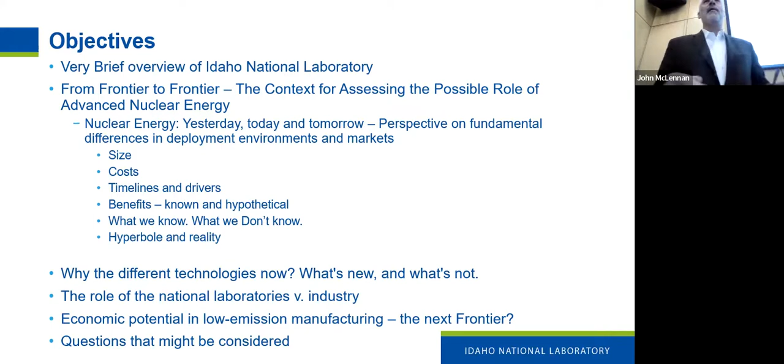So who in the room is familiar with the National Lab System? Probably many of you, so I'm going to skip this.

The Idaho National Lab, I have to tell you where I'm from. The Idaho National Lab is one of 17 multi-purpose labs. The important point is we are the nation's lead for nuclear energy within the National Lab System, not the only lab, but that also comes with a lot of other responsibilities and capabilities, mostly in the national security area, in addition to nuclear energy. So we're just one of many. Lots of good labs out there. But our roots are really very unique.

I think every institution has a DNA, if you will. They have DNA that comes from their past, and it really does carry over into what you see today. All the national labs are like that. The roots of our national lab are very much, I like to think about it, rooted in engineering research. It's not necessarily science per se, it's engineering research. It's how do you build things? How do you scale? How do you understand what works, what doesn't? How do you operate those systems? And then what science needs to go back into the feedback loop?

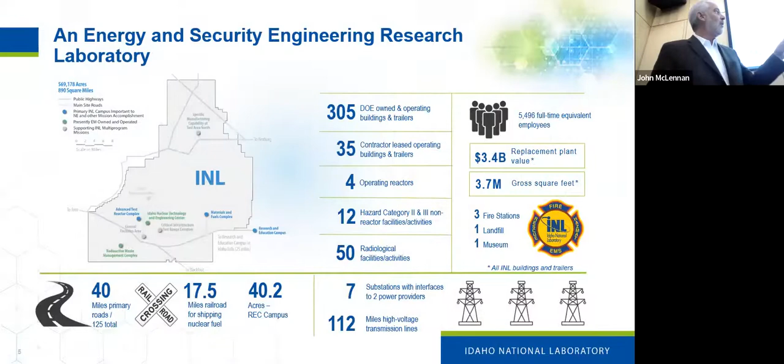So what that history left has actually been built upon quite a lot, is a huge set of infrastructure. You go out to the 890 square miles and you see little mini sites that look like small towns, set up basically to do these different parts of that nuclear energy mission. But that's being deployed now across nuclear energy, but also national security programs. It's a really very important part of the national capability for a number of different purposes. It's quite a neat place to be.

So, past, present, and future. Let's start with nuclear energy from the standpoint of 70 years ago, like I mentioned earlier. You didn't have any of the infrastructure that you have today. You didn't have any regulatory construct. You had actually a lot of hype about the potential for nuclear. Who remembers or has read about a reactor in every backyard? Do you remember that? Read some of the history—that was seriously talked about. So there was an enormous promise for this high density energy source.

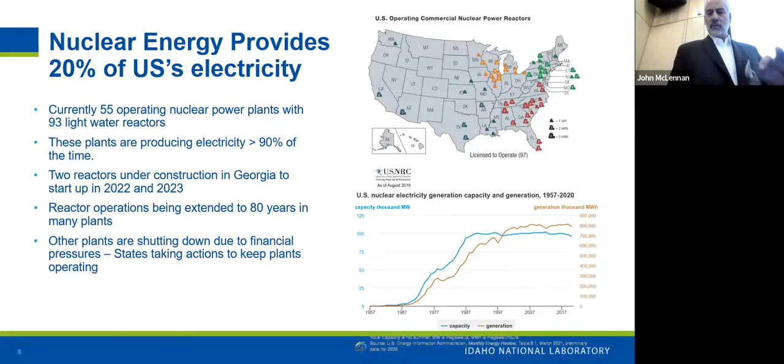Because you do have a mature global nuclear energy industry now. Like I said, 20% in the United States. It's projected that globally it's about an $8 trillion market just in the next 20 or so years. So $8 trillion market. And I'm trying to think what size of market commercial aircraft are.

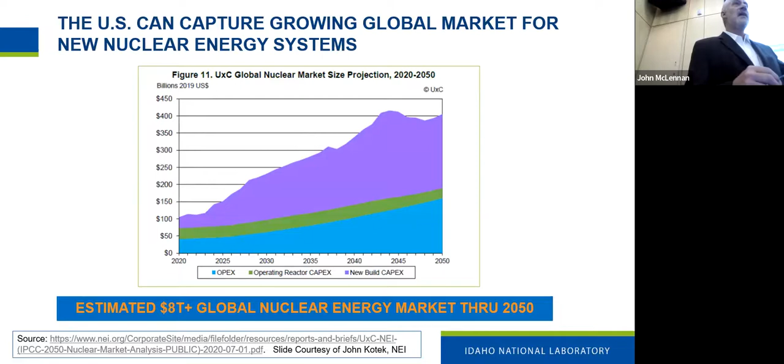I think it's on the order of 15 trillion in that same time frame. So think of the scale that you have today, again, starting from nothing 70 years ago. So what's different? The reason we talk about the context actually gets to the point of why you're hearing about different types of reactors. And many times, the types of reactors that you hear about that might be suitable for today and beyond are different than the last reactors in terms of size. Yeah, there's different classes, styles of reactors as well.

Just like there are different types of cars. They're all cars, but there's different models. And you buy a car to match whatever it is you're doing, whether it's traveling on the highway or somebody like me who's going out camping in the mountains and needs something different. Same thing with reactors. So let's take a look at the general classes of reactors that you're going to hear about.

So existing reactors, very large, generally very large power reactors, right? They have, on the order of thousands of megawatts, 1,000 megawatt a unit. Some of them that are being built in Asia are now 1,800 megawatts, and that's electric. So in terms of heat energy, it's almost three times that amount. They're enormous machines, heat producing machines.

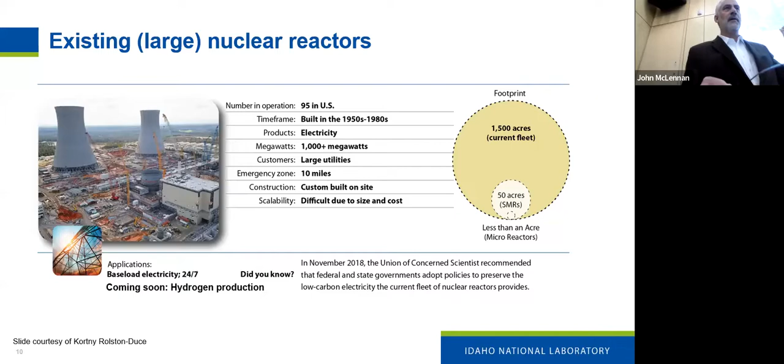So small modular reactors, much smaller, stamp them out. They're standardized in form, but there's also some really important, what people like to call, and I think is an adequate term, inherent safety features that come with these small sizes. So they respond to off-normal events through the physics of the machine, not necessarily relying on engineered systems. And that's where you want to go. So you're flying an airplane and the engines go out, you want to be able to glide that down, okay, without doing much.

These are even better than that because you shut off cooling and they rely on natural circulation. So the notion is you cannot get something like a Fukushima event where cooling water shuts off and within hours you have a problem.

So modularity, inherent safety features, cost, affordability, investability, efficient use of capital, the dollars that you have to play. They also have very small footprints because of the individual nature of those reactor cores.

So you go down to a 50-acre site. And I believe these are being licensed or will be licensed with an exclusion zone at the fence of the facility, so no need for these 10-mile safety evacuation zones and things like that.

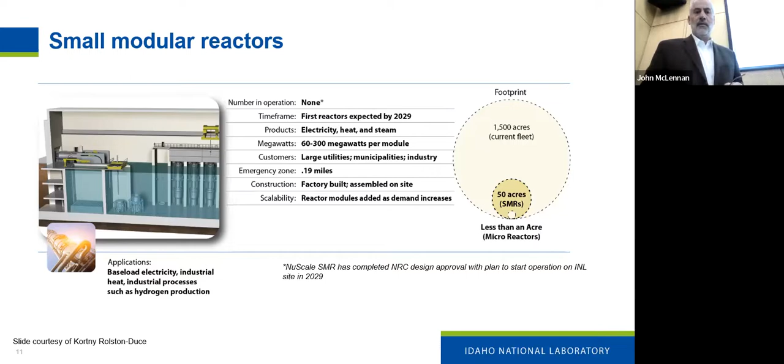You can always improve. Now, this is the area I'm most excited about, and it's microreactors. So what is a microreactor? It's a small reactor that's less than about 20 megawatts. So they're very small.

Now, why is that important? So microreactors can be used for all kinds of different types of applications where you're not going to build a 1,000 megawatt reactor. You're not even going to build, you know, one of these, 6 modules of 80 and 100 megawatt reactors. You want 20 and 50 megawatts at a time.

Now, where might that be? Well, if you're a chemical plant and you want to start reducing your carbon emissions, you can start plugging in 20 or less megawatts of heat at a time with microreactor.

Let's say you're in a mining application. Lots of mines being sited to mine critical minerals for batteries now. Huge interest in microreactors to power those mine sites, which tend to be 10 to 20 megawatts at a time. Alaska, Canada, even remote areas in the West.

Microreactors also can be put in what's called a nuclear battery configuration. So you can think of these as being able to be plug and play. I think of that potential sort of like my phone.

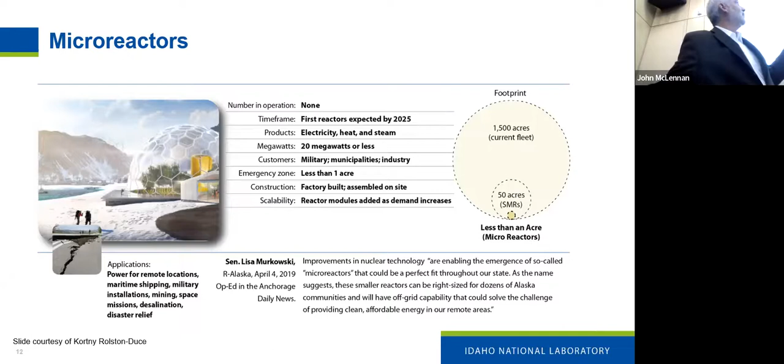Obviously, you operate right next to it. Yeah, you do. The question was, if you couldn't hear it, what are the size of reactors that are in, for example, aircraft carriers, or in some parts of the world, some operate icebreakers with, submarines. So these microreactors have been in one form in these defense applications for 60 plus years.

So, but you point to another point that's really very important.

None of these classes of reactors, although you're hearing more about them and people might tell you they're experimental and brand new, they're not. We operated microreactors out on our desert in the mid to late 1960s. There was a microreactor that powered the Panama Canal Zone until 1970, 73, somewhere in the 70s. There was a microreactor just east of you in Wyoming that powered a radar site for 10 or 12 years. So these have been around, okay?

It's not new. What's new are the materials. There's new materials, there's new fuels, very robust fuels, and there's new electronics, how you can monitor and control and operate the system. So this is a really important point. Different sizes now, none of those classes of reactors are new, and you have operated those.

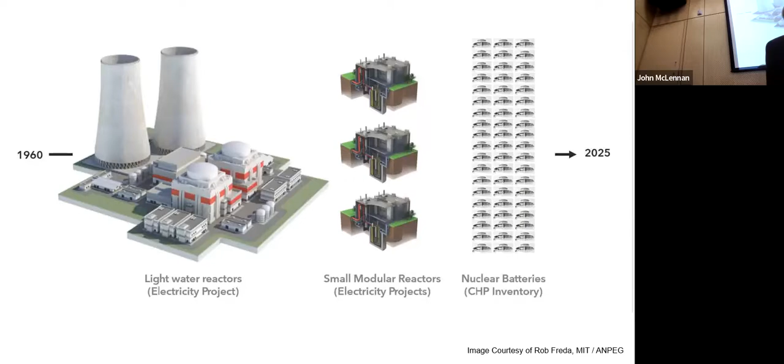But think of the implications. These are $5, $6, $7 billion at a shot projects. These are hundreds of millions of dollars, and those are a magnitude less. So if you're an investor, you think about that. Also, there's very significant safety implications for that. So let's talk about that.

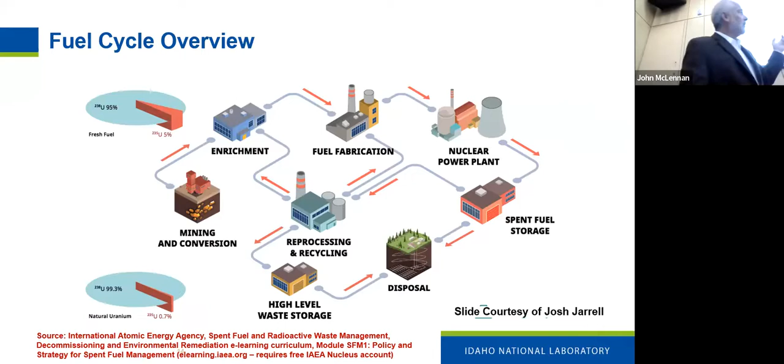But I want to talk about the fuel cycle first, because you should be asking, how do you fuel these things? What are you going to do with the materials from the used fuel? So the fuel cycle, you'll also hear about the fuel cycle, the nuclear fuel cycle. People will talk to you about different parts of the fuel cycle and what might be a problem and what isn't. But it's really fairly simple.

So you dig up uranium, and natural uranium is 0.7% uranium-235, and that's the stuff you need to really operate many of these reactor types. So you got to enrich. First, you have to mill it, mining, and that's the conversion.

Then you enrich it in uranium-235, and there's 2 enrichment sites in the U.S. But the U.S. has really dropped behind the curve on uranium enrichment. We've been importing most of the enriched uranium that we use in our fuel cycle, and that's an energy security issue. Then you make it into fuel.

Then you put it in the power plant, and you use that. It undergoes a process of reactions for a number of years, 3 to 5 years. And then when it's declared spent - and it's spent not when you use all of that material that's in there, it's spent when you build up so many other materials through the reaction process that your reactor doesn't operate efficiently anymore. And that's declared spent.

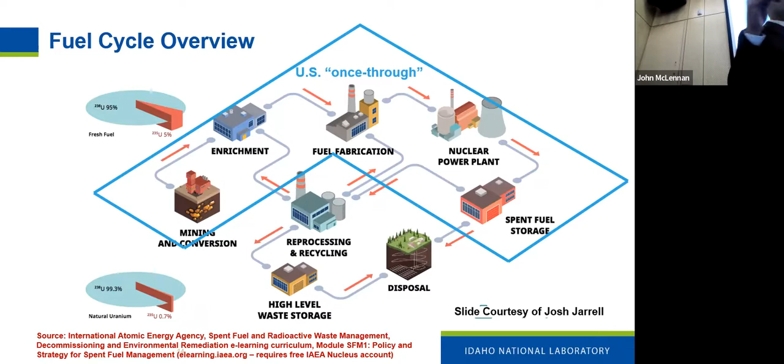All of that I just described is called a once-through fuel cycle. You take the used fuel, you put it in a water pool, you let it cool off because it's thermally hot, right? It's so much radiation coming off of that, you got to cool it down for a number of years, couple of years, few years. And then you can take that and it's ready for disposal. Today you keep that on site, and I'll show you what an on-site storage cask looks like.

Other parts of the world will take that, they'll put it in a long-term permanent repository, just like you do other wastes from industry and other things. You segregate it, keep it.

Some other countries, Japan and France, reprocess their fuel. So they take that burned log - you just burn the bark off - and they reprocess so they can utilize the remaining part of the material. That's reprocessed. And we don't do that in this country. We can talk about why if you're interested. That's actually a long history.

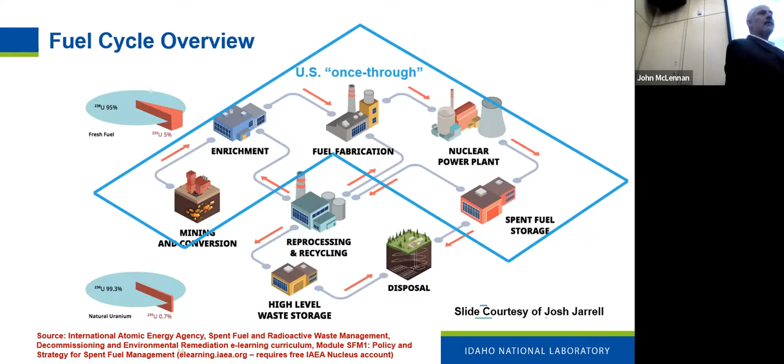So that's a fuel cycle. You're going to hear about fuel cycle, right? People are going to point to different parts of the fuel cycle and say, well, what about, we don't have enough uranium to enrich, or we don't have enough enrichment, or what do we do with the used fuel? And those are all very good questions, and they all have answers or challenges. So I do want to point something out, because a critically important part of this is, what do you do with used fuel?

Every energy generation technology that we have has a waste stream, every one. Solar energy has all the mining, processing, manufacturing waste, and then you got to do something with the cells after 20 years. Some of it's hazardous, some of it's not.

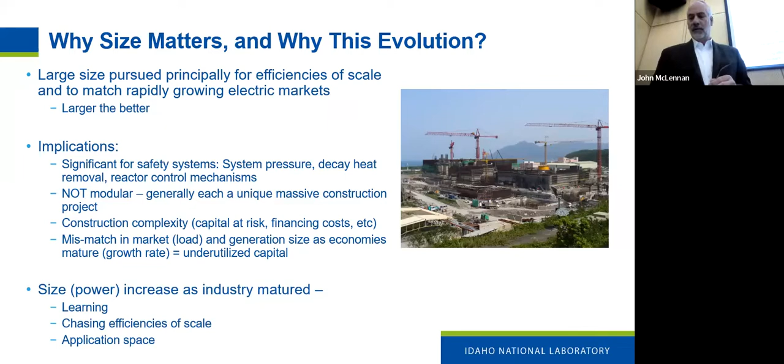As the industry matured, reactors just got bigger and bigger because it was more cost effective. But advanced reactors are trending differently. We talked about the different sizes, but they're not just trending smaller for those reasons, they're trending what's called integrated, and they're trending modular. Integrated simply means combining a bunch of the mechanics within one vessel so you can build it in a factory and ship it somewhere. And modular means you add one module, two, six modules to get whatever power output you want. That's really important.

Now the other thing you're going to hear about is coolant types in the reactors. This kind of freaks people out sometimes because you'll hear about molten salt cooled reactors, water cooled reactors, sodium cooled reactors, gas cooled reactors. And someone will ask, why do I care? I don't even know what that should mean.

In a sense, that's actually the right response. These are just different classes of reactors, just like you might drive an Audi, I drive a Ford truck. They're different mechanics, but they're still all getting you down the road. They're reactor types, but you are going to hear about these. Why are they using different coolants? Safety characteristics that go along with them, and efficiency in terms of thermal efficiency you can get. They're just more efficient, and they're easier to operate because they have passive safety features. That's why people are going to these.

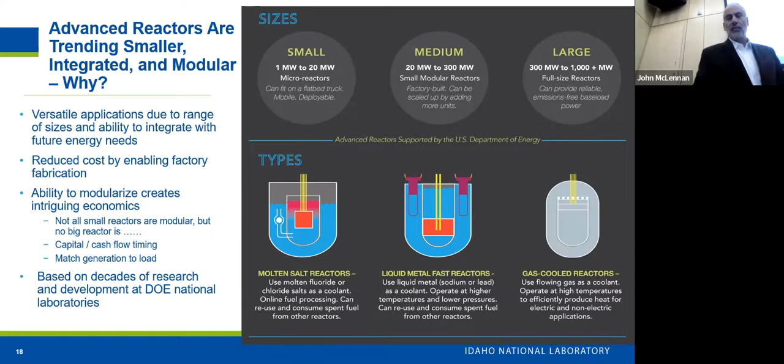Now there's another thing I wanted to point to, and I keep saying this because it's so important: none of this is brand new. There are lots of Department of Energy demonstration programs that have an enormous library of data on all of these reactor fundamentals and reactor types.

Now I want to point out one class, because you're going to have one of these, not the breeder variety, but a sodium cooled fast reactor operating about 100, maybe 120, 150 miles away. How far is Kemmerer? About 150 miles. And I've heard people say, oh, that's going to be an experimental reactor, we don't want to be experimented with our energy. It's fundamentally the same reactor that operated in Idaho up until 1993, 30 years. This is just an example of a number of different demonstration projects of reactors that I'd encourage you to go take a look at.

Look and see what was done. This in particular was important because what they demonstrated was industrial safety: can we handle sodium well for decades? Does it perform well? If there's an incident with it, can we take care of it? Yes, on all those accounts. How does the fuel work? The fuel, something called metal fuel type, really increases the safety margins and efficiency in reactors. That was developed and demonstrated, and you actually toured some of that back in the day. It's the same type of fuel that's going to be used in the new one that's going to be deployed commercially.

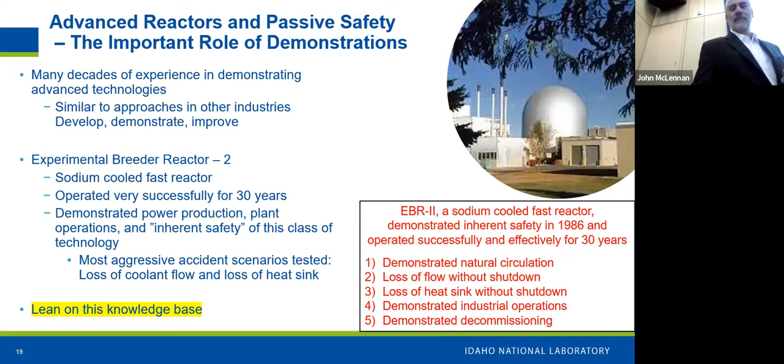Okay, so what's happening in the future? Different reactor sizes, different fuel types, different ways to cool the reactors—they're all advanced reactors. They have inherent safety features, but the sizes allow you to match it to the present need.

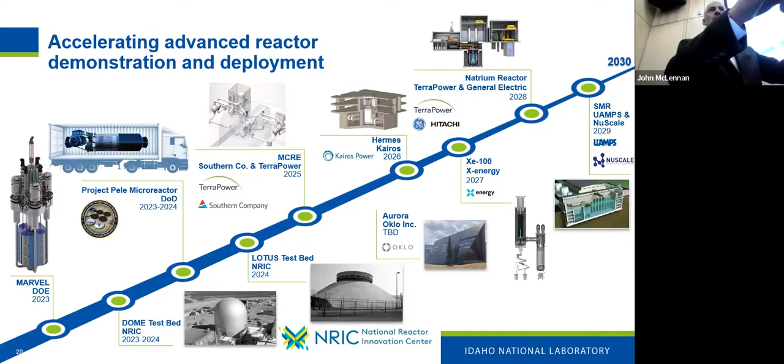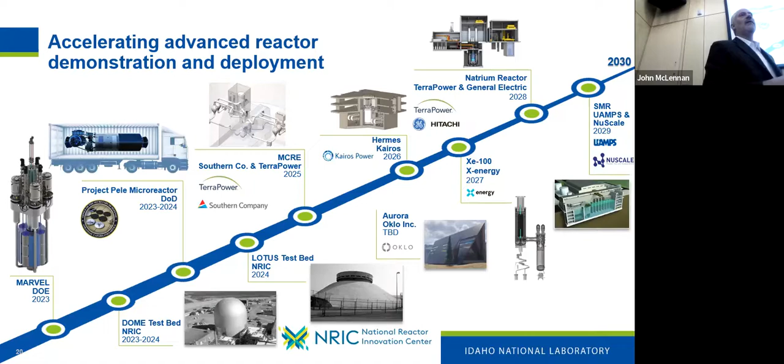Now, the company that's building that has come out and said they're going to build a commercial variant of that, so I start to think about industrial applications. When you bring that together with where capital markets, investors, policy, and public opinion are forcing people into low emission manufacturing, low emission industry—that sort of thing is going to be really important to power, because that's a high density energy source. And by the way, that is a nuclear battery configuration. So if you don't have need for the energy, you can take it away. It's not in the ground infrastructure.

And that brings me to the next part of the frontier that I think is really exciting. It's meeting this world of 8 billion people under the economic reality of having to go low emission. It's not just policy reality, it's not just climate reality, it's an economic reality. And low emission products are going to be not just favored, but demanded.

And that's 30% of CO2 emissions that I worry a lot about. That's industry. So what if you could mix and match your reactor types, size your units so you don't waste so much capital in one shot? You could better size your energy system to the process so you could get to this sort of embedded energy and process, just like you have in your phone. And that would be exciting.

So the nuclear battery configuration has a reactor that's in something that looks like a Connex box. It goes in the back of a truck. It has a power conversion container. It has an instrument control container. Up to 20 megawatts of heat—I'd say up to 50 megawatts if you can get to that point. Standardized design. You're stamping these out in a factory, right? With fuel.

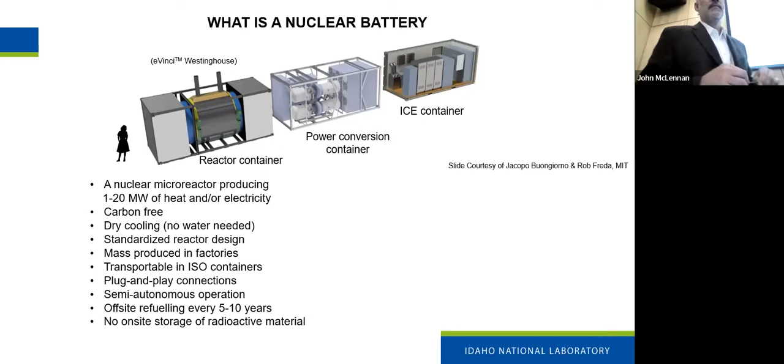And it really changes the paradigm. Just the size is what's mind-boggling to me. So if you think about powering an industrial process, say you only need 10 megawatts, there's a 10 megawatt wind turbine. By the way, you don't get 10 megawatts out of that—you know that, right? You get usually 3 functional...

On average. So here's a nuclear battery size. There's a 10 megawatt solar. And that little green thing is a nuclear battery. So the size comparisons—and I also have some tables on mass of materials used on each—it really is striking.

So the notion is that you use these, depending on the fuel type, lots of stuff we can't discuss in the time we have, for up to 10 years. So you don't refuel on site. So what does that do for you in this competition for low emission manufacturing and power for remote communities and remote operations? Think about it.

Think about the research that still needs to go into it. And I think the instrumentation and control, remote operations centers—I think about a reactor leasing company that leases these and has an operations provider that just comes in, provides energy, say to company X that's operating in Eastern Utah. And they're going to lease you an energy source, they're going to operate it. They have a big operations center, say based in Salt Lake City, that operates 100 of these all over the world. That's what I think about.

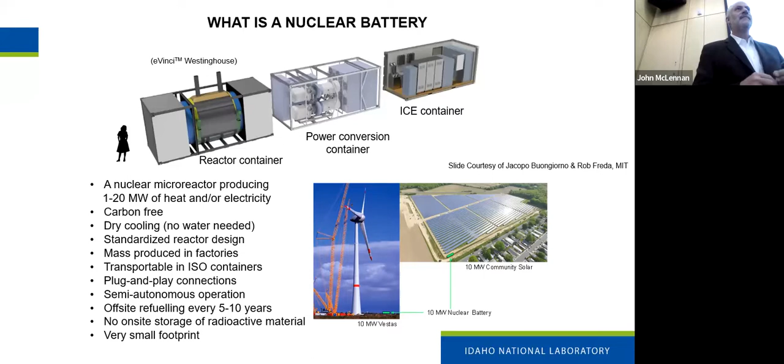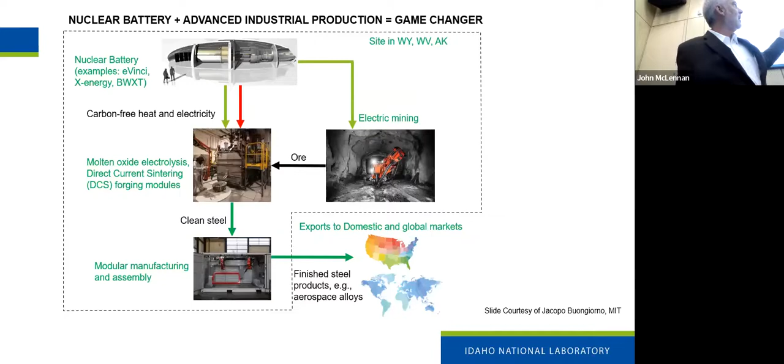And that can be applied to a number of different industries. So here's an example with metals manufacturing, and I'm cognizant of time, so I'll try to hurry up here. But it can be applied across industries. Some folks did a study in the Northwest to see how many industries could take one or more of those modules, and it's an enormous number—from food processing and carbon intense industries to chemicals manufacturing, all kinds of different industries.

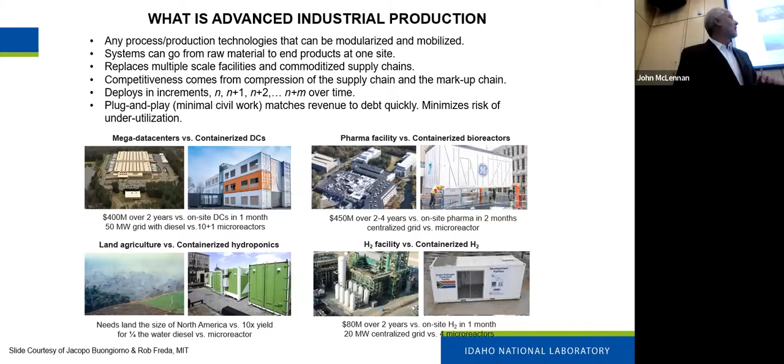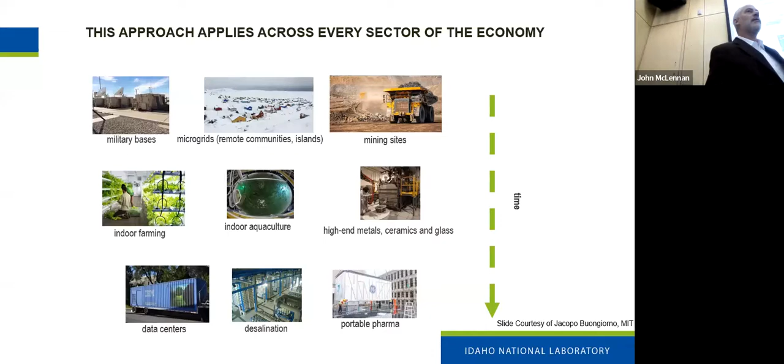But you've got to make it simple. You've got to make it easy. Data centers are something that comes to mind. Glass is actually a regional interest right now, glass manufacturers.

I'm going to leave you with that context. Remember where we came from and how we got to where we're at today, and those types of reactors, but most importantly, the types of applications. And likely in the future, a true frontier is, how do you think about expanded use of nuclear energy in this smaller reactor, advanced reactor configuration?

But remember, you're going to have these advanced reactors in the 2 to 8 year time frame built within, you know, a couple hour drive of you. So you're going to hear about this. Ask questions. You've got an enormous resource at the university.

Always contact the lab for perspective. We're not selling anything, right? The lab doesn't sell stuff. We actually work with all of those reactor developers and manufacturers to help them with fuels, help them with data. So hopefully we can give you an unbiased, but certainly informed, perspective. But we do see the landscape through the lens of what's been done, what is being done, and what could be done. And there's still a lot of cool research to be done, I think, on the application side, not just on the reactor side, which I think is pretty well worn. So I'll leave it there.